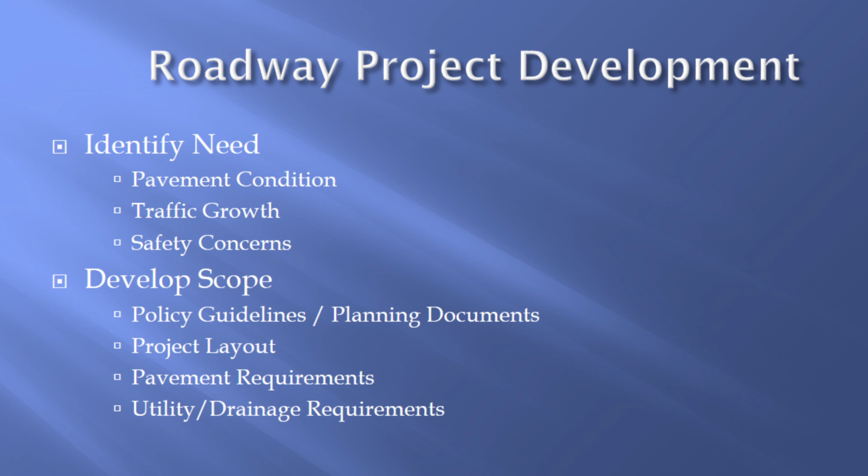Once we've identified the need, we develop the scope, which is typically what we're going to build in the future. What helps us to define the scope are the policy and guidelines council has set forth or planning documents that have been adopted. We look at the project layout, the pavement requirements, and any utility or drainage requirements that are needed for the project as well.

The Motley Drive project was developed using the same criteria as we use for all of our projects. The need for this specific project was based on the pavement condition and safety concerns through this corridor. The pavement conditions are such that it needs to be rehabilitated or replaced in the upcoming future, and we've had numerous complaints through the years with speeding through this particular section of roadway.

The scope was defined using our policy guidelines and planning documents that have been previously adopted by council. We have a master thoroughfare plan that was adopted in 2002, a master trails plan that was adopted in 2008. The specific layout that has been presented to council was approved in 2008, and council adopted a complete streets goal in 2011. The layout for this project was going to be contained within the existing right-of-way, and the pavement requirements and utility and drainage requirements were all clearly identified for this project.

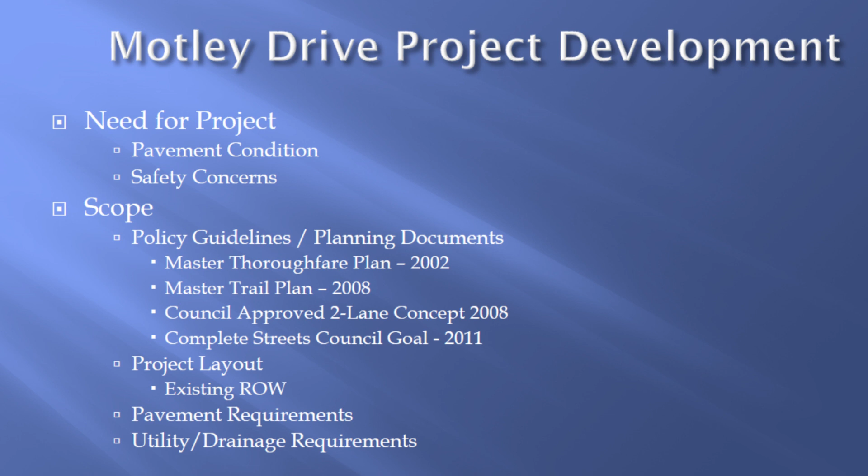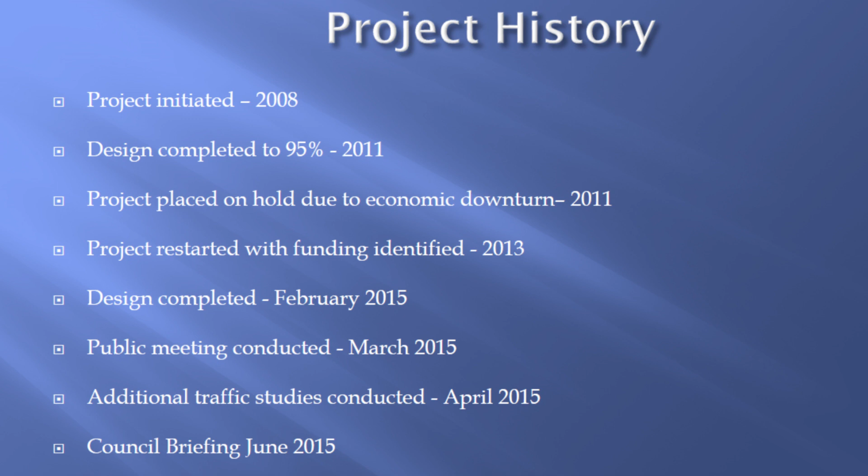The history of the Motley Drive project started in 2008 when the project was initiated. The design was completed to 95% in 2011, but was placed on hold due to the economic downturn in 2011. It was restarted when funding was identified in 2013. The design was completed in February of 2015. A public meeting was conducted in March of 2015. Based on the input at the public meeting in March, additional traffic studies were conducted in April of 2015, and council was briefed on the updates from the traffic studies in June of 2015.

Concerns that were raised at the public meeting in March of 2015 were 5 major points. We had a total of 76 residents who signed in at the meeting, and the top 5 in order that were received were reduction from the 4 lanes to the 2 lanes, the inclusion of bicycle lanes with the project, no on-street parking, concerns with access to alleys, driveways, and side streets, as well as concerns regarding residents from the apartments coming into the neighborhood.

The traffic study that was completed in April of 2015 consisted of traffic counts on Motley, the evaluation of the Motley and Larchmont intersection, including turning movements, queue length, pedestrian traffic, and crossing guard impacts, as well as the school traffic pattern. We looked at U-turn movements, the traffic from the daycare. This was conducted over a 2-week period on 3 separate days so that we could get a good cross-section and study of the traffic that was occurring throughout the week and not just on one particular day.

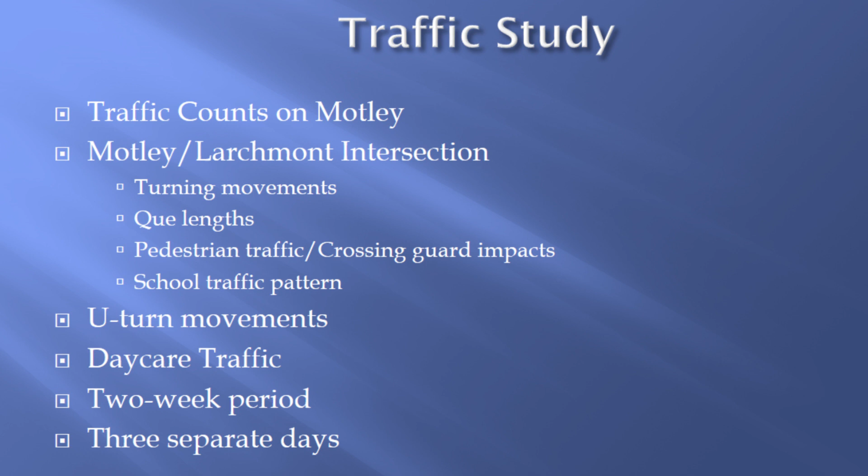The results of the traffic study indicated that 5,000 vehicles per day travel through this corridor. This represents 2,500 vehicles going in each direction. When we design a roadway, we design 1 lane of traffic to carry 6,000 vehicles per day. So a 2-lane design, the capacity would be 12,000 vehicles per day.

The projected traffic from the apartments that were recently constructed on Gus Thomason only amounted to 500 vehicles per day, and no on-street parking was observed during the peak times that the study was completed.

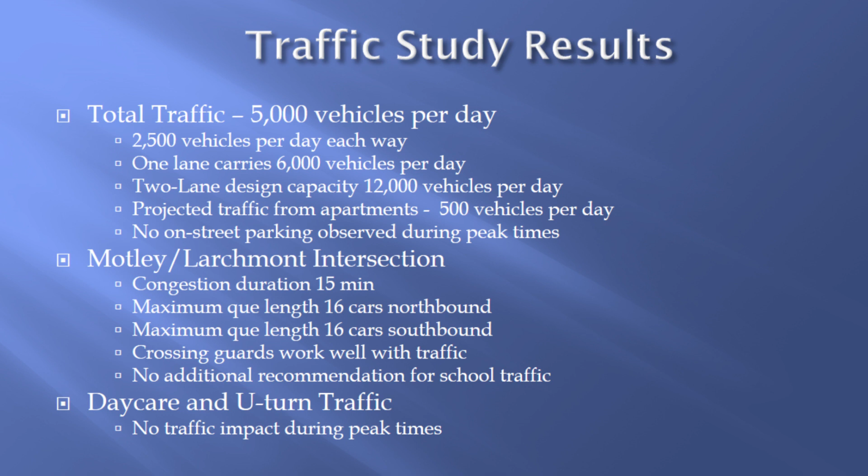For the Motley and Larchmont intersection, the congestion was limited to a period of 15 minutes in the morning and the afternoon, and the maximum queue length for both northbound and southbound was 16 cars. The crossing guards worked well with the traffic, and we did not have any additional recommendations for changes to the school traffic pattern. There were also no traffic impacts observed during peak times from the daycare or from cars making U-turns on Motley.

The options that will be presented to council on December the 7th include 5 different options. In all of the options, what will be included is a 6-foot sidewalk on each side of the road, utility improvements, as well as drainage improvements.

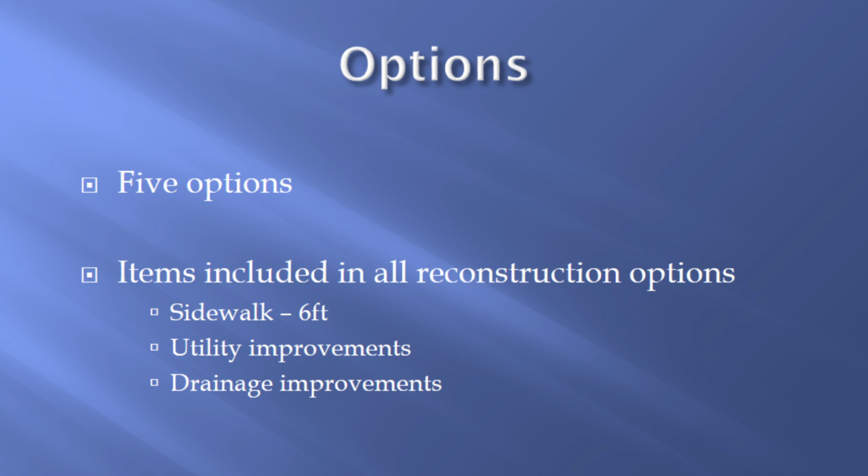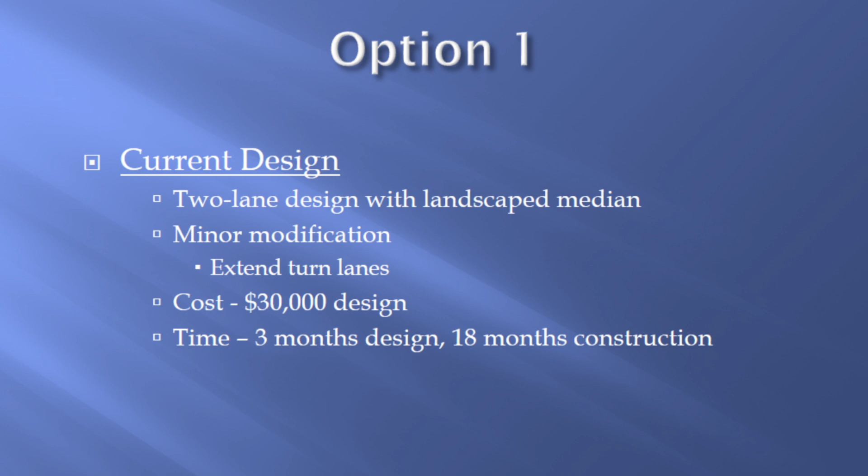In option 1, it is the current design, which consists of a 2-lane design with a landscape median, with minor modifications to the turn lanes at Larchmont to extend the turn lanes based on the results of the traffic study. This design would be an additional cost of $30,000 to modify the design. It would extend the time for the design by 3 months, and it would be an 18-month time frame for construction.

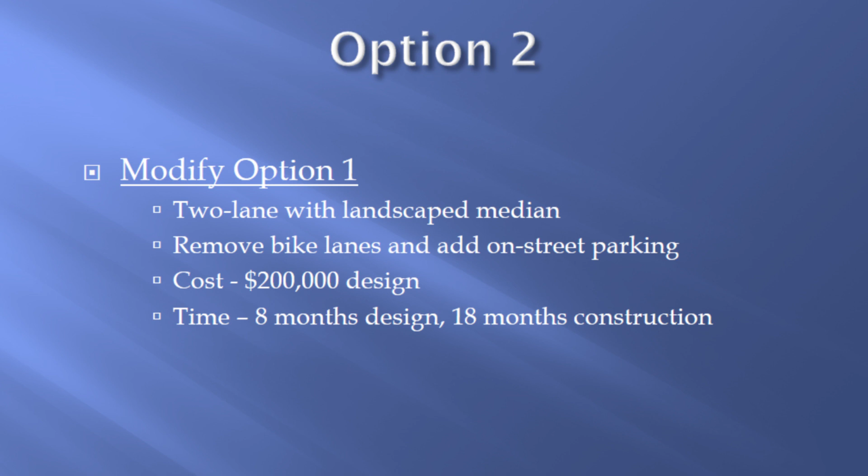Option 2 would be to modify the Option 1 design. It would be a 2-lane roadway with a landscape median. We would remove the bike lanes and add on-street parking through the residential section. This cost would be an additional $200,000 for design, an estimated 8-month extension for this design modification, and the construction time is estimated to be 18 months.

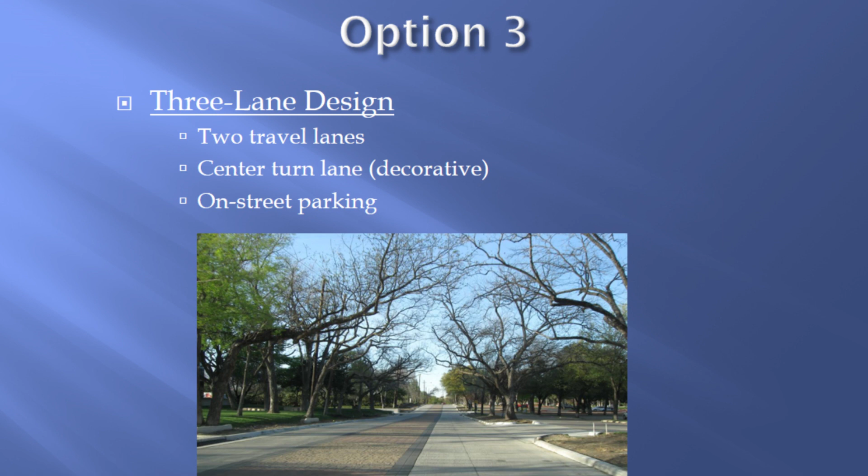Option 3 is a 3-lane design that would consist of 2 travel lanes with a decorative center turn lane and on-street parking. The benefits of Option 3 would be improved access for the residents with the continuous center turn lane. It would provide on-street parking. The parkway width in front of each of the residential properties would be increased. The driveway lengths would be increased, and it allows space for multiple transportation options.

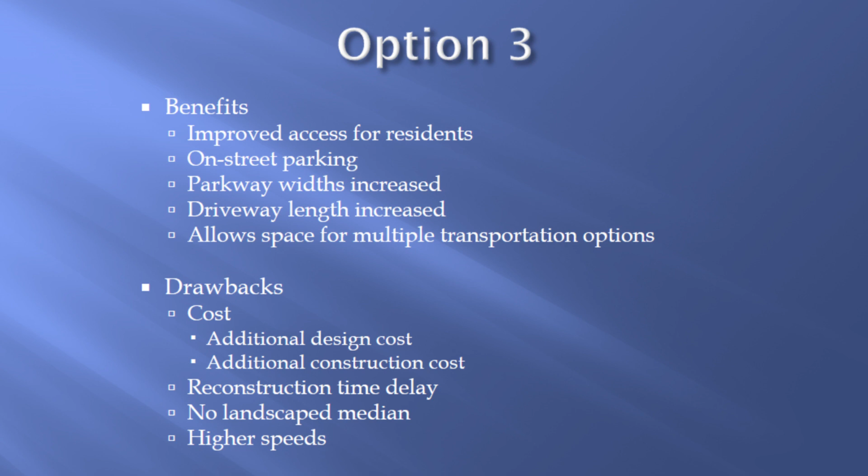The drawbacks for Option 3 would be the cost, the additional design cost, and the additional construction cost, the reconstruction time delay. There would not be a landscape median, and this section would most likely result in higher speeds through the corridor.

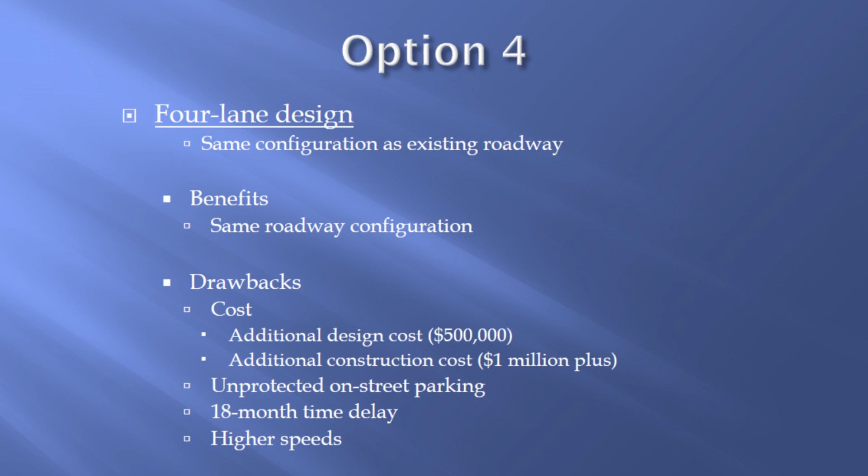Option 4 would be a 4-lane design, which would be the same configuration as the existing roadway. The benefit of this option would be that it is the same configuration as the roadway. However, the drawback would be the additional cost, including the design cost estimated at around $500,000 and additional construction cost estimated to be upwards of $1 million. It does not provide for protected on-street parking. There's an 18-month time delay for the design, and this option also increases the speed through the corridor.

The final option would be a pavement overlay. This would consist of spot repairs where the road needed to be leveled up before an overlay is performed. The roadway would be milled and a new asphalt section would be put on top. The benefits of this option would be the cost. This is the least expensive alternative at around $250,000. It would be the same roadway configuration. There would not be a time delay for design or construction.

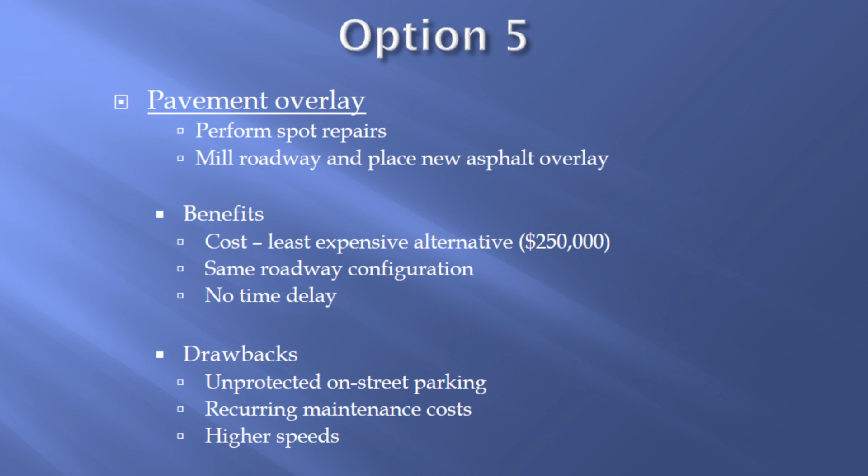However, the drawbacks of this option: this still allows for unprotected on-street parking. It would still require recurring maintenance costs, and it would also introduce higher speeds through the corridor.

An overview of the 5 options. Option 1 is a 2-lane design with a landscape median. Option 2, a modification of Option 1, which removes the bike lanes and provides on-street parking. Option 3 is a 3-lane design with decorative center turn lane. Option 4, same configuration as the existing roadway. And Option 5, which is an overlay of the existing roadway.

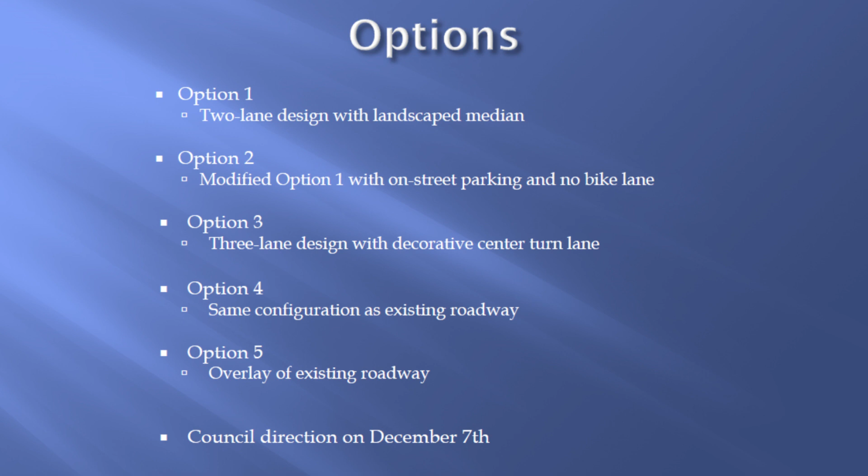All of these options, as well as this presentation, will be presented to the Council for direction on December the 7th.